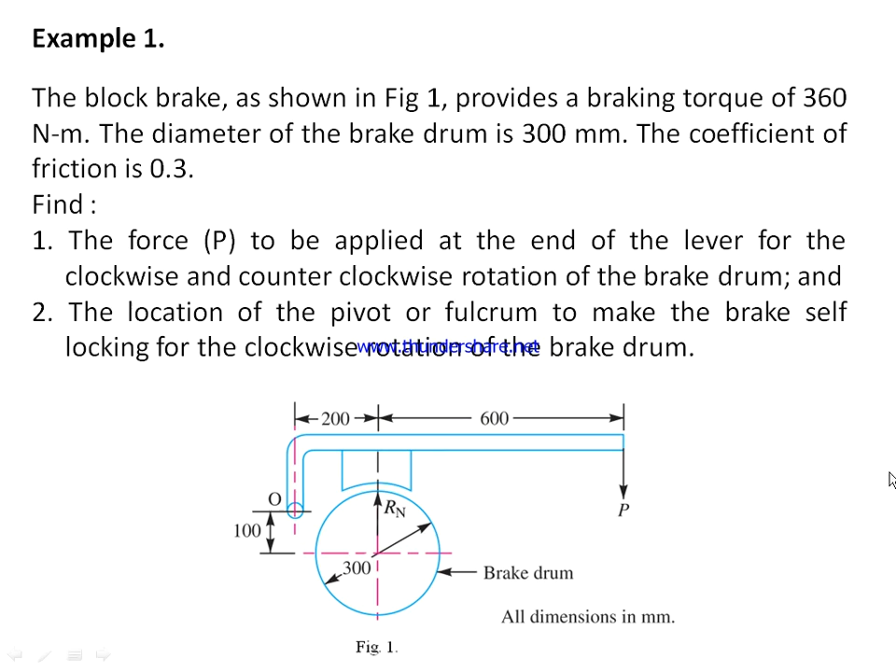Now this is the configuration of the diagram of the block brake as per the given dimensions. The drum is rotating in the clockwise direction. This is the block, the tangential force, which is acting at a distance of 50 mm from the fulcrum point, and the fulcrum point distance from the center of the drum is 100 mm, and the total length from the fulcrum point to the point of application of P is 800 mm.

Now for the case 1, wherein we need to find out the force P for the clockwise rotation of the brake drum and also for the counterclockwise rotation of the brake drum. Now for this configuration, we know that, or in general, the braking torque is the tangential load times the radius of the brake drum. TB is given 360 into 10 to the power of 3 Newton millimeter, Ft into 150 millimeter. This is the radius of the drum, 150.

So hence the tangential force Ft is 2400 Newton, and by using this relation, the normal force Rn is 8000 Newton. Now for this case, the braking torque is given by this equation: Tb equal to mu P L into R divided by x plus mu A.

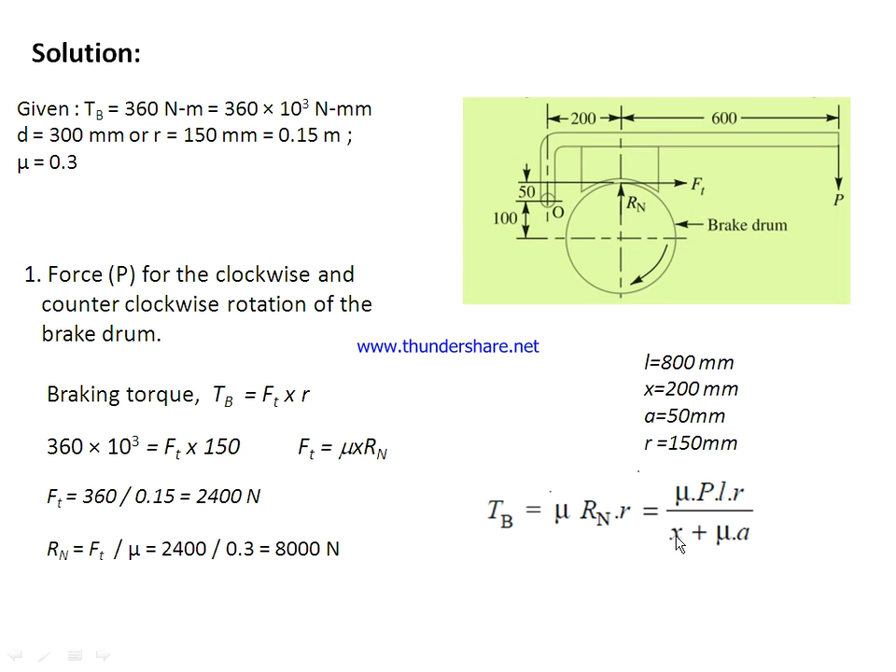Now for the first case, wherein the drum is rotating in the clockwise direction, what should be this force magnitude? We know this equation, and by rearranging this equation, we get P equal to Tb into x minus mu A divided by mu into L into R. So all these things are known. Hence we get magnitude of the force P as

1850 Newton. Also, by using the first principles, if you want to calculate the magnitude of the force P for this configuration and for the equilibrium of all the forces, you can take the moment of all the forces about point O and get this equilibrium equation, and from that equilibrium equation also you can get the magnitude of this force P, which is found to be 1850 Newton, same as that obtained from this equation.

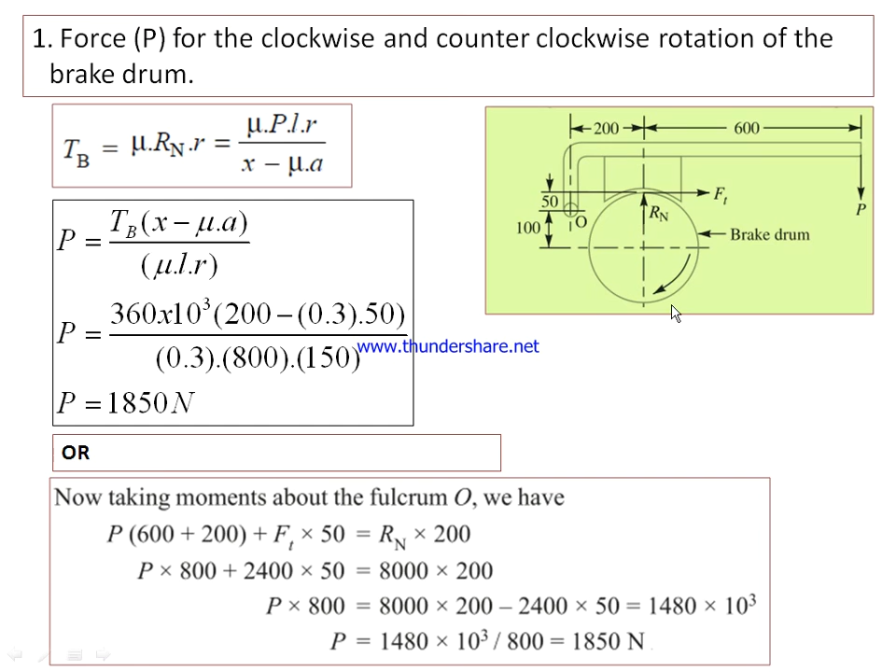Now similarly, for the counterclockwise rotation of the drum, either you can use this equation, or again you take the moment of all the forces about this point, right? But only thing is Ft is in this direction in this case. So hence for this case, the magnitude of the force P is 2150 Newton. So compared to the previous one, where you have 1850 Newton when the drum is rotating in the clockwise direction, now it is 2150 when it is rotating in the counterclockwise direction. Just note that.

Now second part of the problem is to find the location of the pivot or fulcrum, this point, to make the brake self-locking. Now the clockwise rotation of the brake drum is shown in this particular figure. Now let x be the distance of the pivot or the fulcrum from the line of action of the tangential force to the fulcrum point O. What should be this distance in order to make the brake self-locking?

Right? Now we need to find out this distance between the fulcrum point O and this line of action of Ft, so that the magnitude of this P is 0. That means the brake becomes self-locking, wherein you don't have to use extra P in this case.

Now let us start. For this configuration, let us take the moments about the fulcrum point O, P into 600 plus 200 about this point, then Ft into x. Now it is x, not 50, right? In order to make the brake self-locking, what should be this distance? That we are determining. So don't use 50. We have taken this as now x millimeter. So Ft into x minus Rn into 200, Rn into 200 anti-clockwise moment, must be equal to 0.

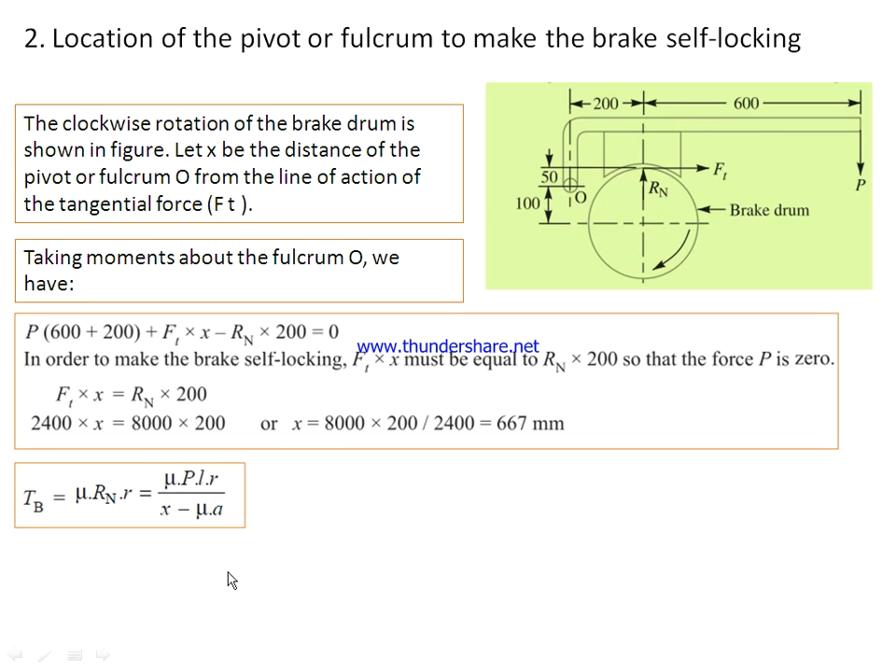So hence, in order to make the brake self-locking, this quantity Ft into x must be equal to Rn into 200. Hence P will be equal to 0 automatically. Therefore, Ft into x equal to Rn into 200. So if we equate these two, because Ft magnitude we know, Rn magnitude is also known, the only unknown is x. So hence x will be equal to 667 millimeter. So from this to this, the length should be 667 millimeter in order to make the brake self-locking. Or otherwise also you can use this equation and find out the value of x.

Now problem number 2. It is also on shoe brake. Figure shows a brake shoe applied to a drum by a lever AB, which is pivoted at a fixed point A and rigidly fixed to the shoe. The radius of the drum is 160 mm. The coefficient of friction of the brake lining is 0.3. If the drum rotates clockwise, find the braking torque Tb due to the horizontal force of 600 Newton applied at B, that is the end of the lever.

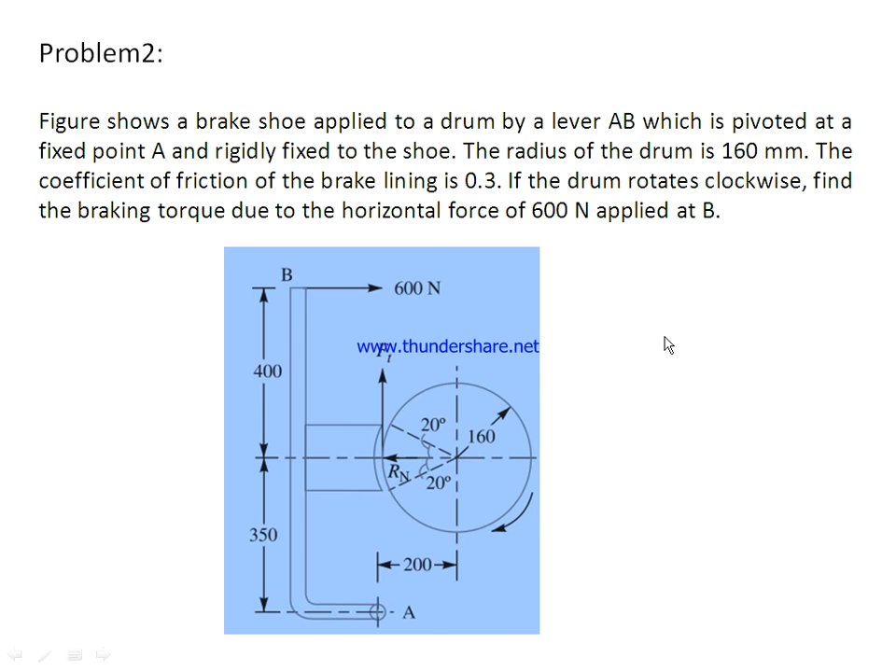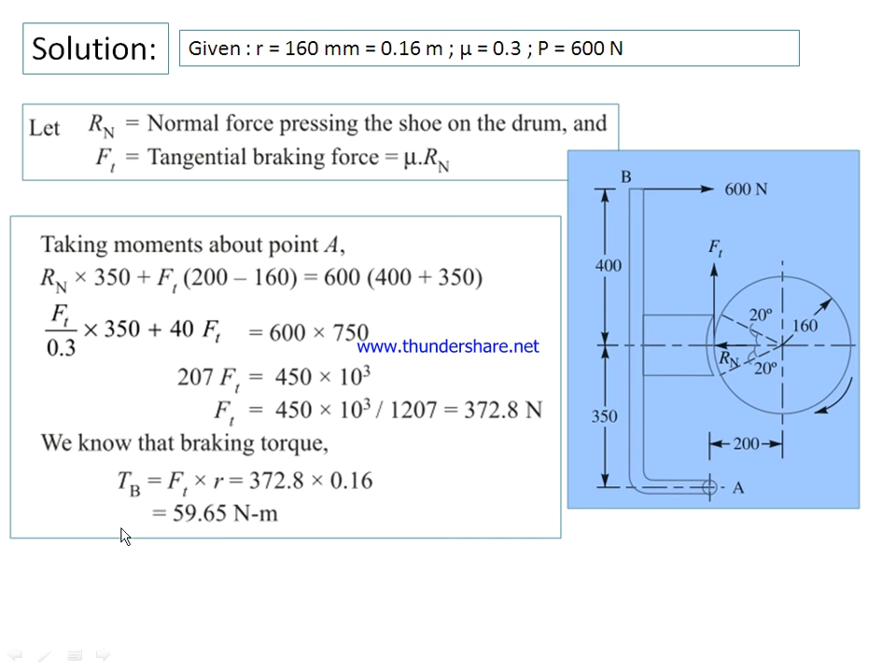Now let us find. This is the given block brake configuration arrangement. The lever is like this, and this P is in the horizontal direction. Now let Rn be the normal force here, Ft be the tangential force, which is equal to mu into Rn. Now as usual, taking moments about point A of all the forces, we get Ft equal to 372.8 Newton. And also we know that braking torque Tb is Ft into R, the radius. So here it is substituted in terms of meters. So hence braking torque is 59.65 Newton meter.

Problem number 3 is a problem on band brake. A simple band brake operates on a drum of 600 mm in diameter that is running at 200 rpm. The coefficient of friction is 0.25. The brake band has a contact angle of 270 degrees. One end is fastened to a fixed pin, and the other end to the brake arm 125 mm from the fixed pin. The straight brake arm is 750 mm long and placed perpendicular to the diameter that bisects the angle of contact. See, this is important, bisects the angle of contact. So the lever or the brake arm is so placed that it bisects the angle of contact.

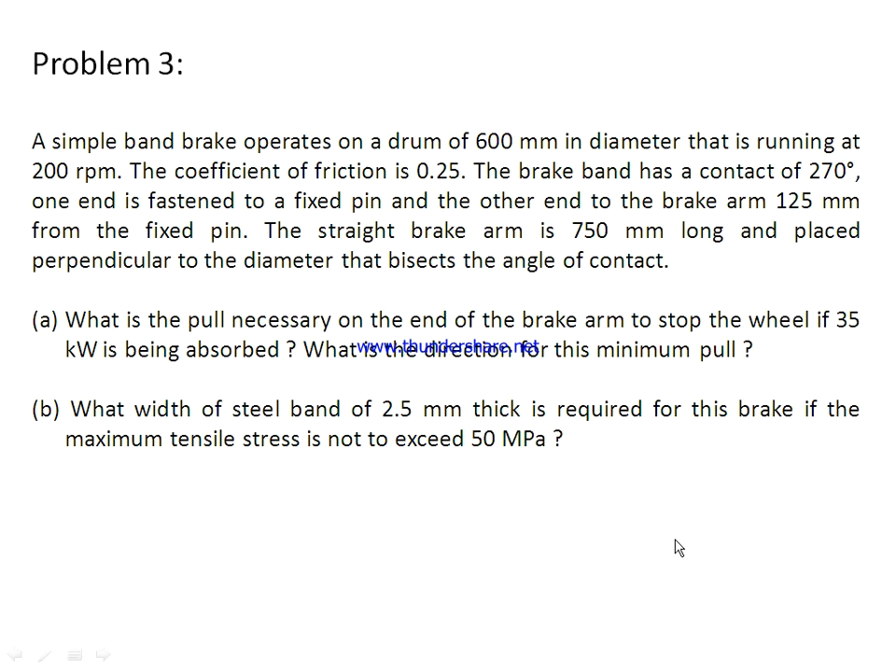In that case, what is the pull necessary on the end of the brake arm to stop the wheel if 35 kilowatt is being absorbed? What is the direction of this minimum pull? Then second is, what width of steel band of 2.5 mm thick is required for this brake if the maximum tensile stress is not to exceed 50 megapascal. Now read the problem carefully, and after reading you have to draw this sketch.

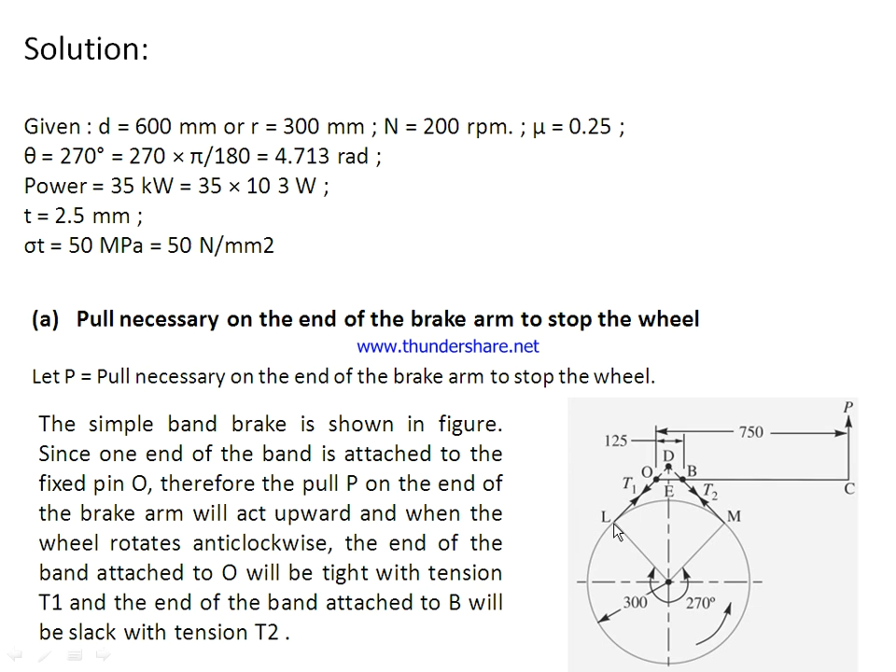So now this is the arm or lever OBC. The tension T1 is on the tight side and T2 is on the slack side, and this is the angle of contact, the angle between points L and M. We know that the ratio of tensions is given by 2.3 log T1 by T2 equal to mu theta. Theta here is substituted in radians: 270 degrees, 4.713 radians. Hence we get T1 by T2 equal to 3.25, and let this be equation number 1.

And let T be the braking torque. We know the power equation, P equal to 2 pi N T by 60 into 1000. N is the speed, given 200. So hence TB, the braking torque, is 1667 into 10 to the power 3 Newton millimeter. Also we know that braking torque is given by T1 minus T2 into R. R is 300 millimeter. So hence the difference T1 minus T2 is 5557 Newton, and let this be equation number 2.

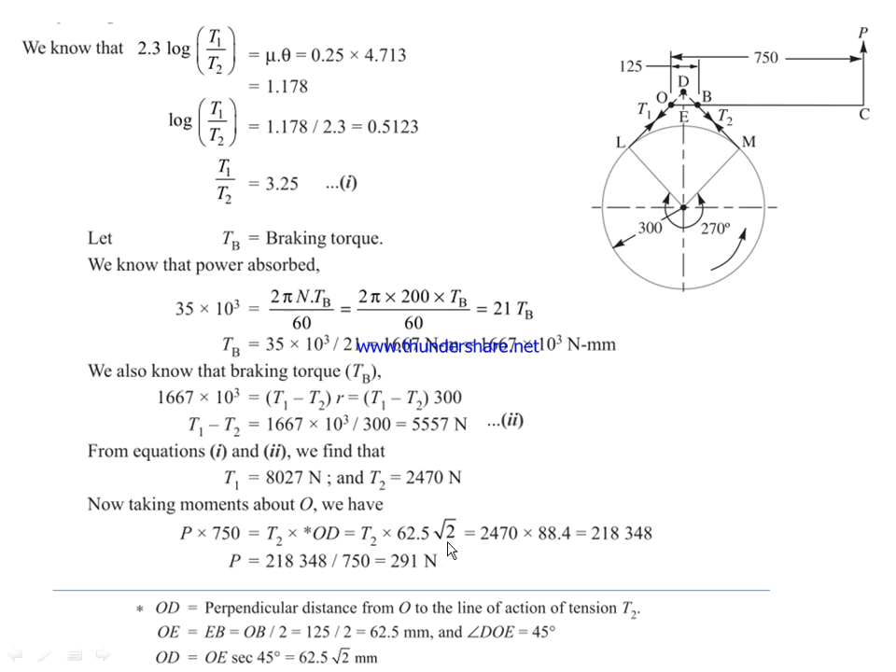By using these two equations, we get the tension on the tight side as 8027 Newton and tension on the slack side as 2470 Newton. Now for this configuration, taking the moment of all the forces about O, we have P into 750 equal to T2 into OD. How OD is obtained is mentioned here.

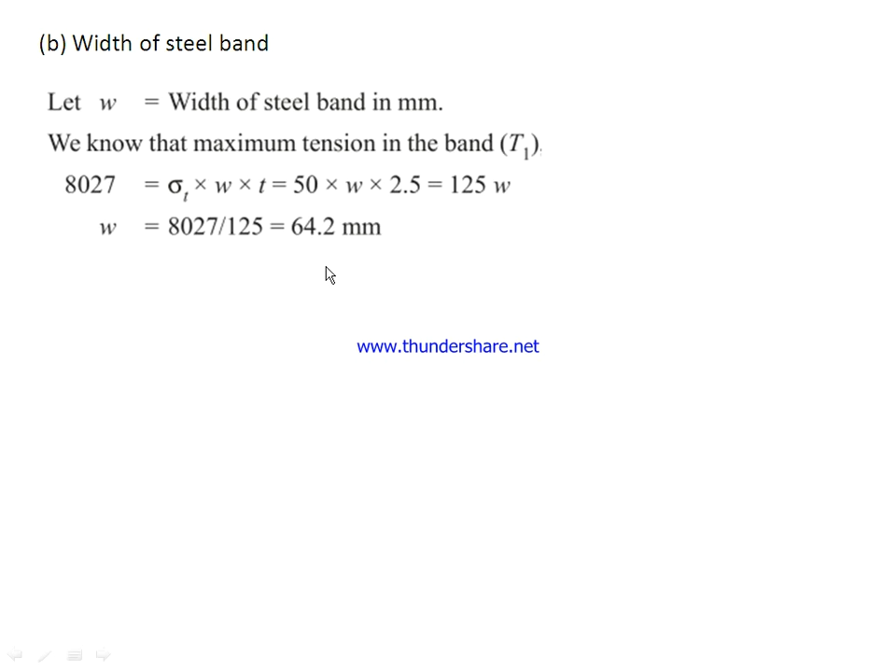Now width of the steel band. We know that the tension on tight side T1 equal to sigma t into w into t. w is the width of the band and t is the thickness of the band. Sigma and t are given, w is unknown. So hence the width of the steel band used in this band brake is 64.2 millimeter.